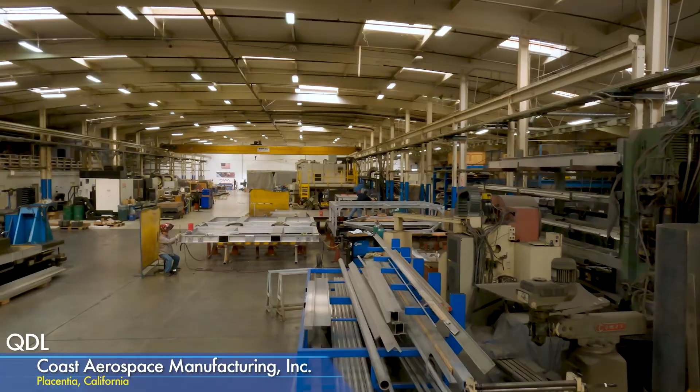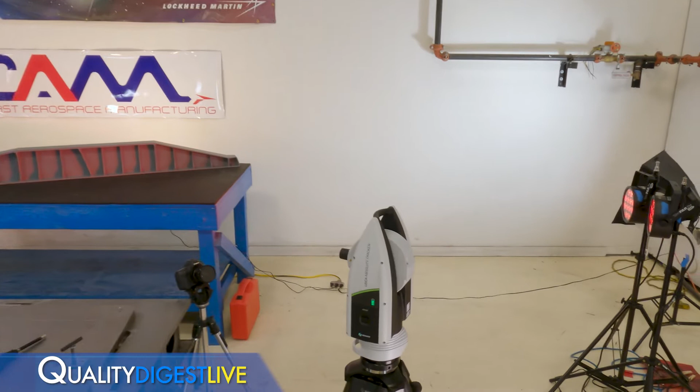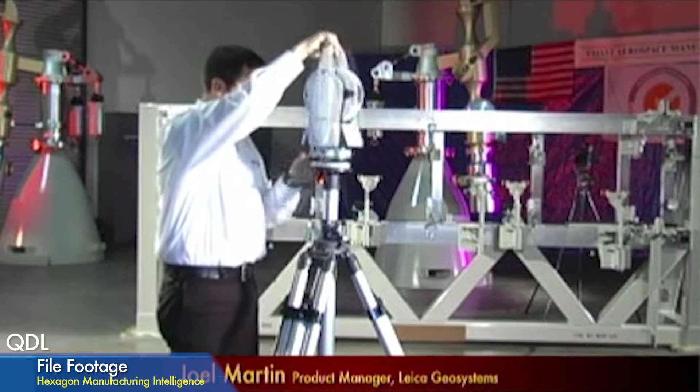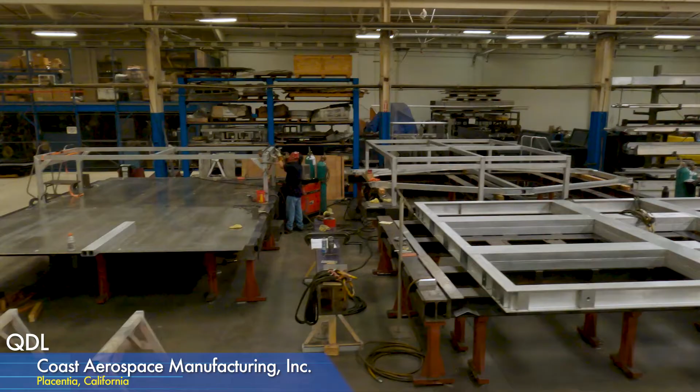And Chris, we'll get to you in just a minute, but I just want to thank Louis here for letting us come once again to your facility and take up so much of your time so that we can talk about some Hexagon products. We were last at your facility about 12 years ago when you were over in Huntington Beach, not too far from here. And you've grown since then. Now you've got your brand new building, well, not brand new now, but a new building, and it's all yours. I believe you were leasing before, so your company's grown quite a bit.

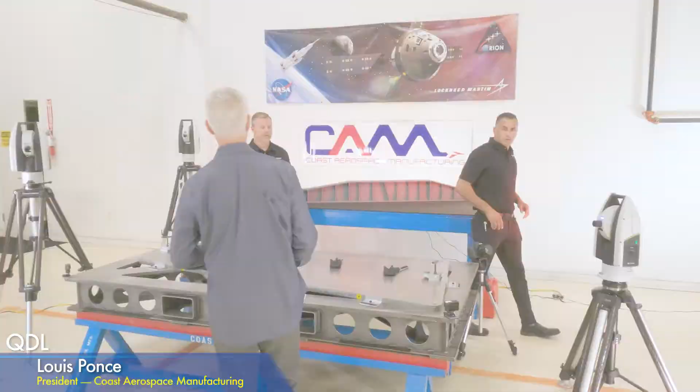It's grown. And before I start, thank you, Dirk and Chris. The relationship I've had with you guys has been wonderful, so I'm more than happy to do this. I hope this works out for Hexagon, and I'm sure your viewers really appreciate the aspects of what this brings to them. I think it's really important, key, just like when I do internships, it helps that new generation come in. So I appreciate the old and the new.

Well, thanks, Louis. Why don't you tell us a little bit about what Coast Aerospace does? Well, we've always been in the tooling manufacturing business, but over the years we've added additional products, if you will. We now do electronics. Our design group has grown, which has entailed more electronics, more proof loads and testing and so forth. So those aspects have grown along with the company. We're in a larger facility now, just enjoying it, whatever we can when the business is good. It always seems to be predicated on how much work is there.

Yeah, so this is a good time. How old is Coast? I started at Coast in June of 1999. And so you've had a relationship with Hexagon for quite a while as well, right? I mean, what, 20 years? 15 years? A very good one over the years, one that I feel very confident when I get with my customers for support and their products.

Louis had a predecessor to this. This is an AT500 MR laser tracker. He had a 901 prior to that, and he had a T-probe with that system. He was able to take the T-probe that he had but couple it with a new tracker that's much more portable, and move into new technology while still being able to use the software he was using in the past, but then going to new versions that have more capability.

So the value that we have in relationships like this—I look back 12 years ago when we introduced the AT401 laser tracker here with Louis—is that we're able to bring it to market, but we're also able to take feedback from our customers like Coast and take that back to our colleagues that are developing new products, whether it be metrology software, CAD/CAM software, accessories for machine tools, or accessories for metrology devices, and make their life more efficient.

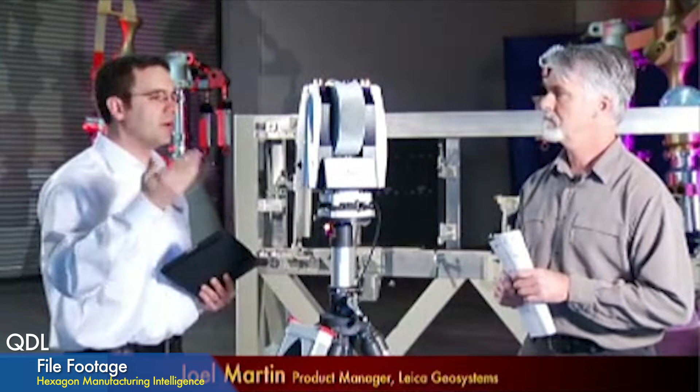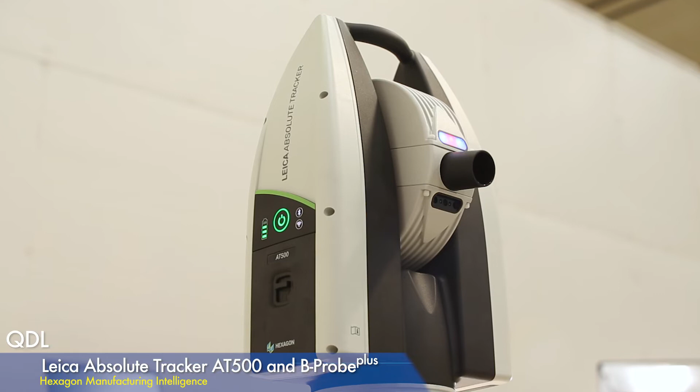Chris, you mentioned that the last time we were at Coast, there was a different laser tracker, the AT401, right? That's correct. That was kind of the new release of a tracker at that point. We did an AT401 launch event at Coast Aerospace some 12 years ago at their old location. I remember it very well because I was only 3 years into working with laser trackers at Hexagon at that point in time. So it's nice to revisit Coast to bring the new product that will replace the 400 series with. We went from 12 years ago, we had 3 iterations of the 400 series tracker.

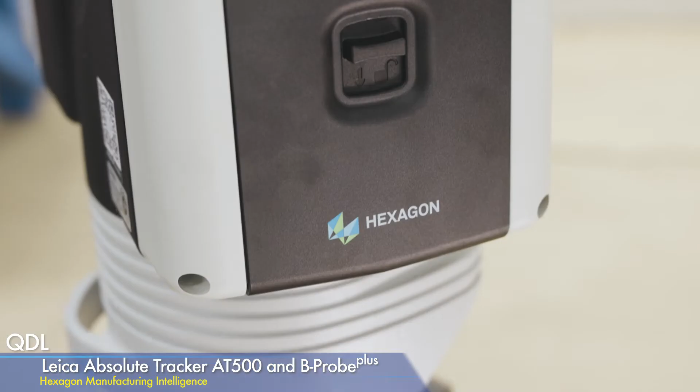We went from the 401, which was just a 3D tracker using a reflector, to the 402. At the time the 402 came out, we made improvements in the technology, but we also added the B probe as a probing solution for it. Then we came to market with the 403, also offered the B probe, and it was more dynamic than what the predecessors were. And now, in June 8th of this year, we released the AT500 as our new system.

Joining the Absolute laser tracker family, we call it the Absolute trackers, and we have 4 systems now. They look very similar in nature. We have the AT500, the AT600, the AT930, and the AT960. It really depends on the customer's application, what tool is best for the job.

Our application engineers and sales engineers work with our customers to go in and say, what are the tolerances that you're trying to achieve? Are the parts way up high that you're trying to measure? Do you need longer ranges, or can you get by with a shorter range? So our sales engineers and application engineers are picking the right tool for the job, and the tool in this particular case is our Absolute Tracker AT500. We offer it both as a 3D tracker, or as a probing system, or if a customer decides they want a 3D tracker up front and they want to add the probe, we call it the B Probe Plus, they want to add the probe at some later date, they can.

Okay, let's take a look at them.

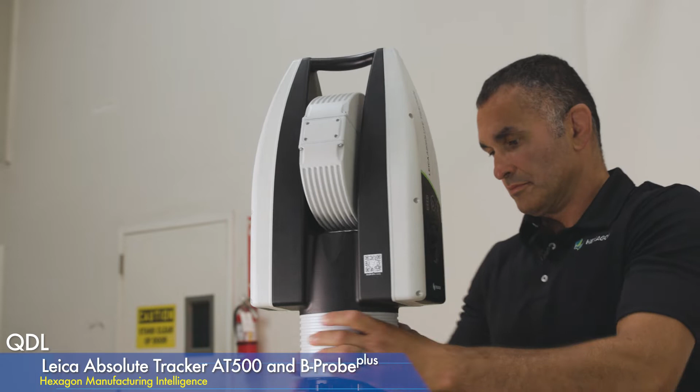Tim Cordova is joining us here. Tim is our sales engineer for the West Coast for trackers. Tim's been on board longer than I have. So by the time we were at Coast the last time, 12 years ago, Tim had already been on board at Hexagon, and prior to that, Leica Geosystems for 6-8 years. I joined about 4 years after Tim joined. So we've been supporting this product in entirety, and we feel like we know it really, really well and love to help our customers with it.

Was that the setup? That was the setup. So as you can see, there I am - I just propped it on top of the tripod, and here, he was done. I set it up here, and we're ready to go.

That is actually one of the key differences, from my recollection, one of the key differences from the 401 that I saw a long time ago, which was still a pretty easy setup, but that's like all in one, right? Yeah, so what we've done, this is our very first laser tracker in our Absolute Tracker family, and our first laser tracker at all, where we've integrated the controller into the tracker itself. So if you look at Louis' AT960 here, we have the controller here, and we have the sensor cable here. Right, and a battery, is that a battery pack also?

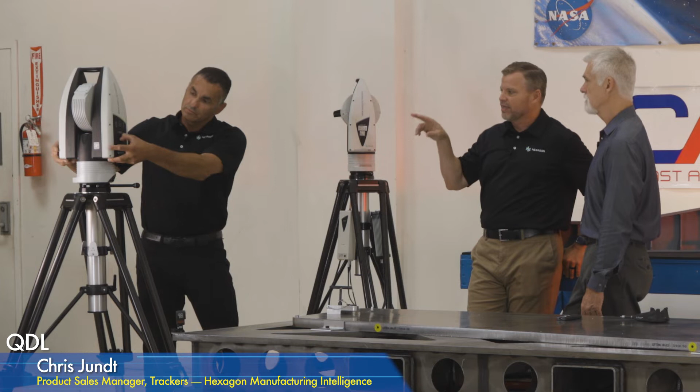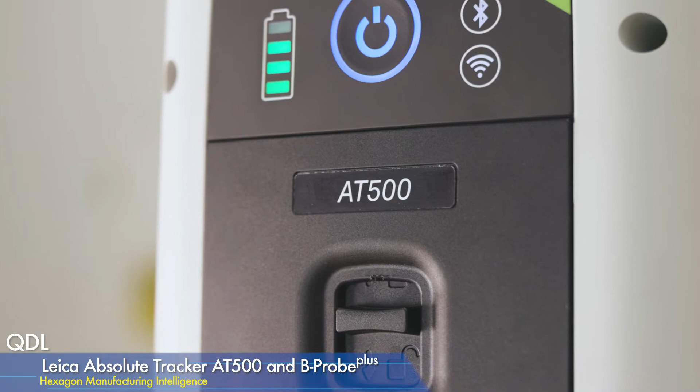That is an external battery available for it, but everything's external here. This is even cleaner yet, where we have an integrated controller. We have 2 batteries on board here. Those 2 batteries will actually run the system for up to 6 hours. But the beauty is those 2 batteries are not integrated into the laser tracker, they're removable. So the benefit is if you recognize, by viewing the battery indicator, that a battery is getting close to being out, you can grab another battery and hot swap the batteries in place with the tracker not shutting down. So we just cleaned it up from a portability standpoint.

You saw Tim walk in here with the handle, and he put it right on the stand. He now hits the button to turn it on. Okay. And because we have an absolute distance meter in it, it is solid state and it fires up very quickly. Okay. With the sake of the 960 here, it still has an interferometer as well, and there's some cases and some applications where people really like that highly dynamic laser tracker yet today.

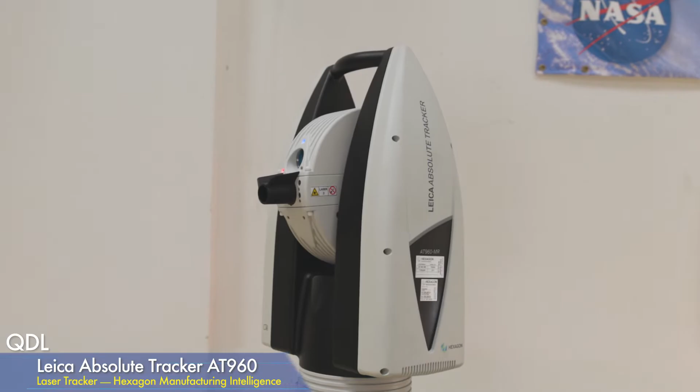But the IFM has a laser oven. The laser oven takes about 8 minutes to warm up. Okay. This being solid state, you hit the button and it's ready for use.

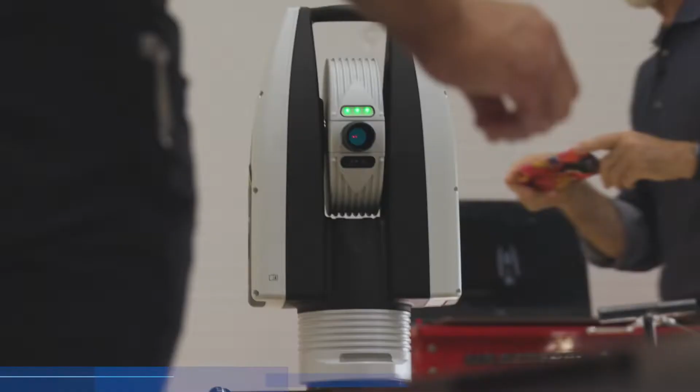I hesitate to say this, but I think I've heard you mention a few times that this is kind of an entry level laser tracker, but it also kind of just depends on what your needs are, right? It might be entry level for some people, or some people it's like, no, I don't need any more than that. It does exactly what I want. It's really the entry to our absolute tracker family.

Okay. And where Tim and I looked at it for a long period of time, we've always been known for the highest end equipment. Sure. So when you look at competitive products out in the market, we would have a gap in our product offering. And really the AT500 and the AT500 probing system now fills that gap. And it's been very popular for us so far. So there would be certain cases people absolutely love the 400 series, but it left a bit of a gap in our overall family, and this fills that gap.

What kind of customer problems, application problems do you feel that the 500 addresses best? Well, in the case of what we offered before, certainly the 960 MR T-Probe, we can offer this with a scanner. We can do robot calibration, highly dynamic work. Not everybody needs that, right? So somebody's needing to pay for something that maybe they don't need because it's our highest offering.

Sure. So where we find that the 500 fits in is shops very similar to this. Like in the back of Coast shop here, they're doing a lot of fabrication, they're doing welding, and you have the probing system here in the AT500 that matches the tolerances on the part. Typically in industry, you want the system to be 4 times more accurate than the tolerances in the part. So it allows for a less costly solution to still meet those requirements and the customer to be able to get their job done. So that's really where it falls in.

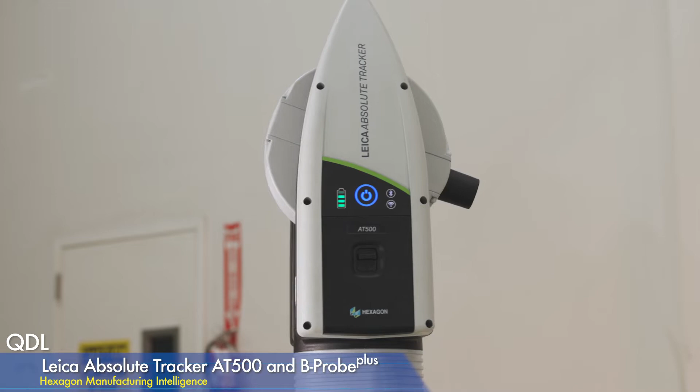Yep, there we go. And I think all your trackers have, what do you call it, where you can break the beam and it'll recover it. But even more than that, you can not just break the beam, but move to a different location and it'll pick it up again. It'll reacquire the target, whether that target be a reflector or a B-Probe Plus, or like with the 960, whether that target's a T-Probe or a scanner.

It'll just pick it up and you're able to use it. Now the great indication, what you showed there, is you can tell right away that the blue lights come on in the tracker where it's looking for a target right now, because it's not locked on and it's looking to acquire it. This is our 5th generation of Power Lock. So we continue to make improvements in what its capability is.

I would say our 1st generation came in, what, 2009, Tim, something like that? Yeah. So that 1st generation was better than what competitor products offer today. But we're at our 5th generation, so as you're tweaking the firmware, as you're tweaking the capability and new component capability comes to light, then we can apply that to the product and make it better yet today.

I've tracked with an AT500, even though our specs are 160 meters, I've been outside in the sun at 190 meters and break the beam, maybe a car goes through the beam, I'll come back to either looking for the beam and locking on, or if you come back to about 80, 90 meters, it just finds the reflector and off and running.

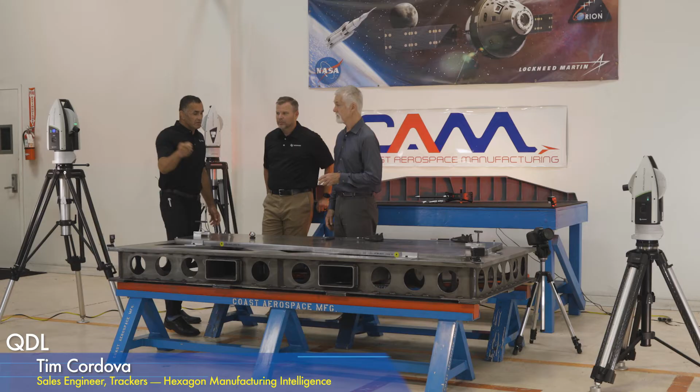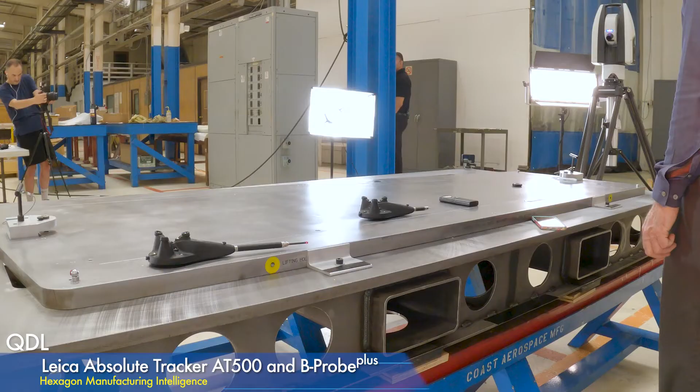I would like to show what that looks like. Maybe we can do a quick demo of moving around with the reflector, going behind an object or something, so we can actually see how it does reacquire. Yeah, we're gonna switch to that one because it's just a better view. Okay. But look, you see that tracker just instantly grab this one. Yep. And now as I walk over here, I'm gonna go behind these beams and the tracker's just going to follow and catch on to me on the other side.

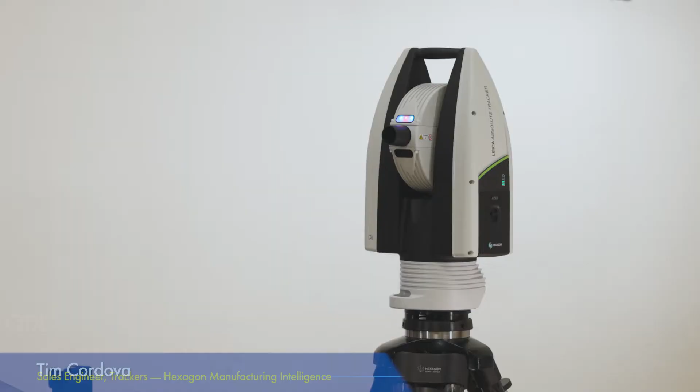Obviously the beam was lost. Yeah, so right here, the beam is lost. It no longer can see the beam. Right. Once I get into its view, it instantly locks back on and picks it right back up. Okay. So if you look back many, many years, when laser trackers first came out, most of them were interferometer based, no ADM.

And so you would start at a bird bath on the laser tracker, that's your zero position, and you would move out and start using it. You were always so cautious. You would tape off a given area because you don't want people breaking your beam, you don't want forklift traffic across it. If somebody broke the beam, or you're using a 1/2-inch corner cube reflector and you just tilt it ever so slightly and the beam breaks, that means a trip back to the bird bath. All the way back, line it up. Right. So for all of our trackers today, we have no bird baths on our systems.

They initialize automatically when they're ready, and you present a target to them, they acquire the target, and you just start measuring. We've had customers justify purchases of our systems in a shop like this largely because of Power Lock. If you can imagine being on Louis' 5-axis machine down here, doing an inspection on the machine, and you're being careful where you're walking, and there's some trip hazards there, you're not wanting to pay attention to the reflector, you want to pay attention to your health and wellness, right? So you get to where you need to go, you're safely there, lock on, and start your inspection or aid in setting a detail on a tool or whatever you may be doing.

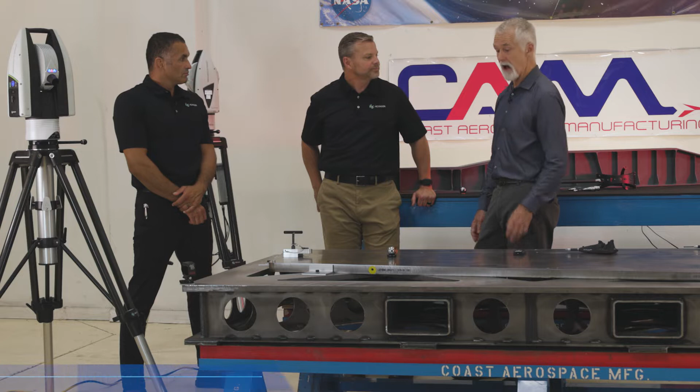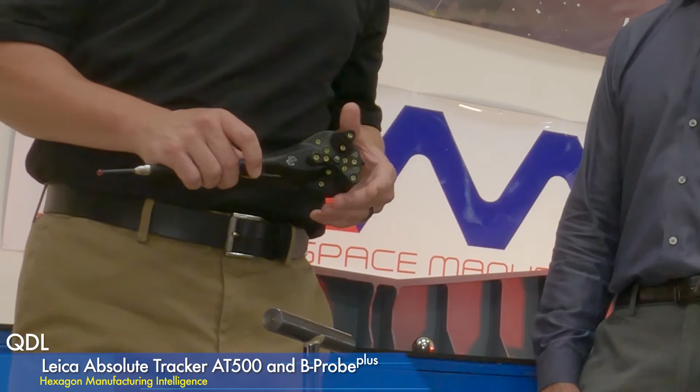Before we get to actually taking some measurements, you also mentioned the B Probe Plus. So we did have what was called the B Probe with the AT402 and the AT403. I would say most of our customers that used the B Probe back in those days were using it just to minimize, maybe if they could take 2 points, having to do a station move with the laser tracker. They would gather the points with the B Probe. The user experience was not fantastic, but it could get the job done.

What we've done now is the B Probe Plus has come out with the AT500, and it's a totally different experience, largely because of the technology that's in the tracker to be able to not only track the corner cube reflector that's embedded in here, but also track the LEDs that are on the face of it. We get XYZ position here with the laser. The camera base gives us basically pitch, roll, and yaw of where the probe is during the measurement. And so never would I have thought in the past, with a 402 or 403 tracker with a B Probe, would I do a part inspection like this.

Right. It's just not dynamic enough to do that. Right. Certainly with the 500, it brings that capability to light. Okay. And we call it the B Probe Plus. The tooling that goes along with it for probes is M5 threaded extensions, M5 threaded styluses. So if someone has a T-probe already, or they have some of these styluses from a coordinate measurement machine, they can use it on the B Probe Plus. But it's really our entry-level probing system.

What Tim's seen with customers here on the West Coast is it's very hard to distinguish the difference between the measurements coming off a B Probe Plus and an actual T-probe. Okay. It's performing well beyond our expectations, but it's where we come from. Our Swiss colleagues are ultra conservative. So when they put a specification on something, typically our customers, on a day-to-day performance, see about half of the spec.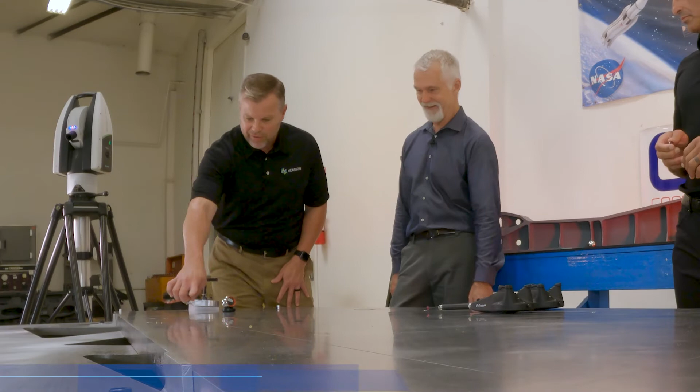Okay. Well, should we move on to taking some measurements and measure some tooling? Okay, so this is a composite layup tool that's in front of us right now, right? That's correct. Okay, and Tim, we're going to be setting up and measuring this. Yes. And we should mention that this is not a flat tool. This has actually got some contour to it, right? That's correct. It looks flat, but it's not. There's about 4 different surfaces right in this area from the scribe lines in.

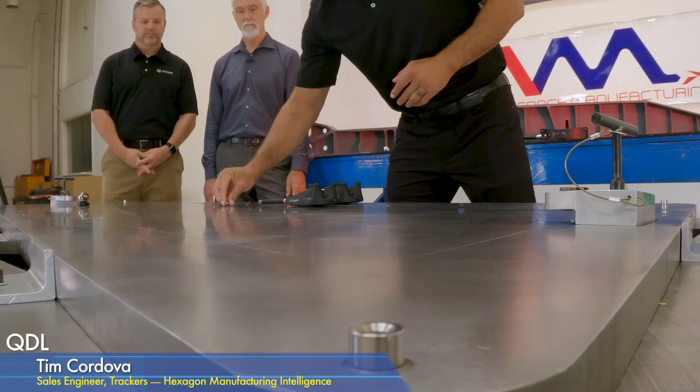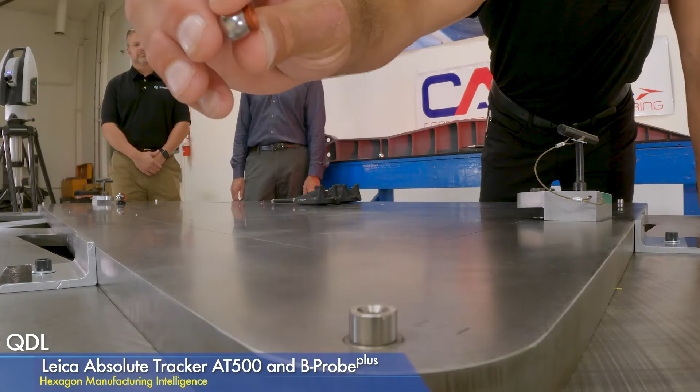Okay. Yeah, what I'm going to do is use the 1/2-inch ball and use the tooling ball targets to align to this part, and then from there we'll be able to run the reflector anywhere on the tooling surface and see where we're high, where we're low. We can switch back to our probes and check deeper areas, and then we can also grab the scribe lines. So first thing we'll do is align to the part. I'll grab my beam and measure the first point. And you see the tracker signals me that it got it.

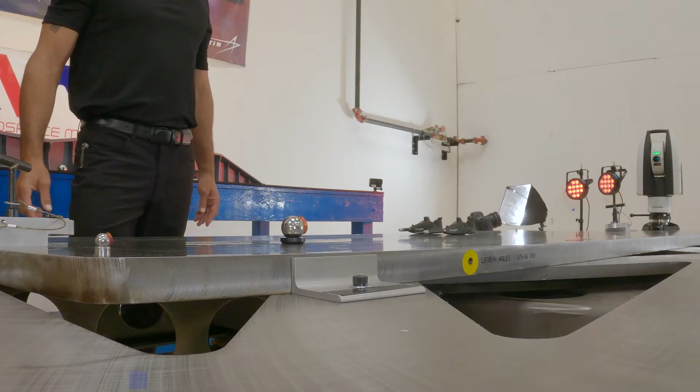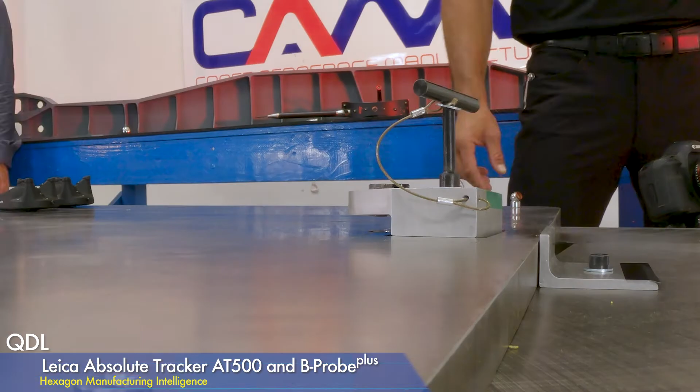Second point. I also get an audible sound from the computer, which is nice. And the three flashing green lights means it's taking a measurement? When it's flashing, it's taking a measurement. When they're solid again, it's like, hey, I'm done taking a measurement. It's okay for you to move. Okay. So if you're in a really noisy environment, you wouldn't necessarily hear that beep. Just work from the lights. Just from the lights, okay. Mm-hmm.

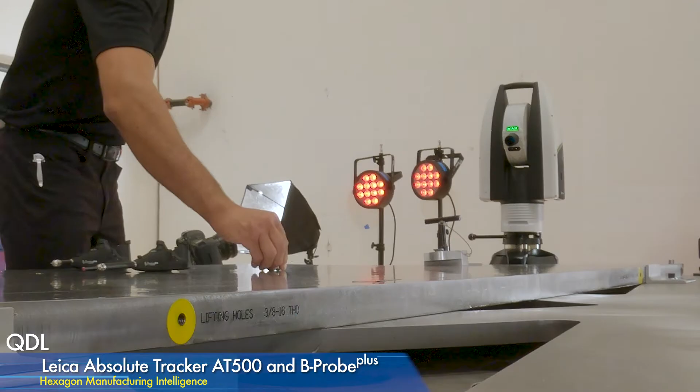And now anywhere I touch on the screen, I'm seeing the deviation back to the CAD model nominal, which is fantastic. If I wanted to record that point, I could just use my remote here and trigger a point to record it. And now I have a comparison point at that location. So I did a couple things. With the reference points, I used what's called a stable point. So as soon as the ball was stable within a tolerance, the tracker measured the point automatically for me.

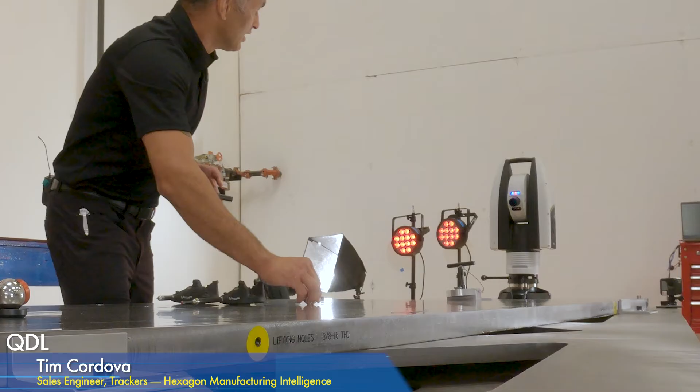Okay. I could do it that way with this, but I also have the remote, so now whenever I want to measure a point, I just go ahead and hit a single. If I wanted to scrub, I'd have to go change the setting there, and I could scrub dynamically at 100 hertz and collect 100 points a second with this tracker. Okay. So that's a big difference from the AT500 to its predecessor, right?

The AT401 that we brought to Coast 12 years ago, we only did discrete point measurement with it. It was only taking about 3 to 5 points a second when the 401 came out. This is doing 100 points a second, okay? So it's more dynamic. We got better from the 402 to the 403, but we were maybe max of 10 points per second. We're at 100 points per second here, and for most users, that's plenty fine for what they need. Yeah.

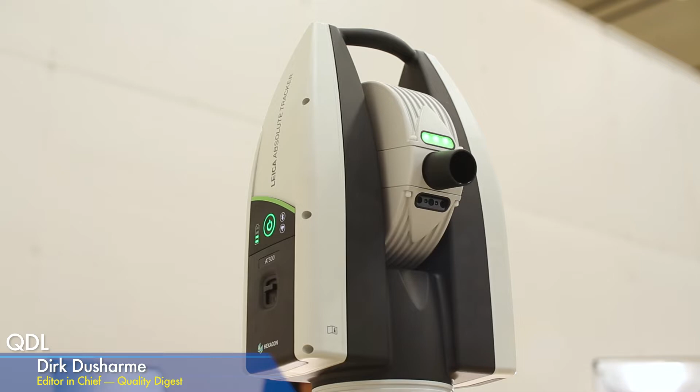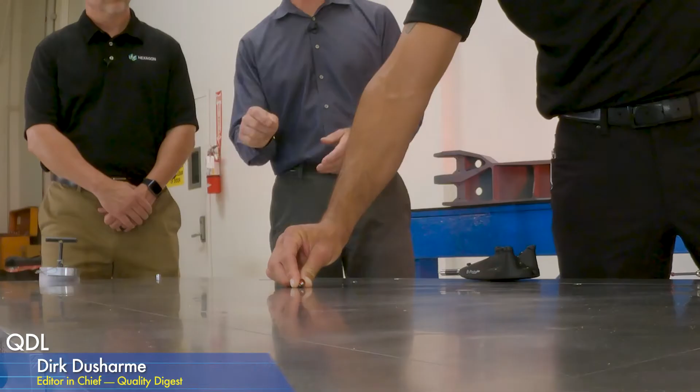So I saw you were taking points using the remote, right? Yeah, so I didn't want to use stable point, I just want to trigger a point whenever I'm ready, so I'm going to hit the button here and record a single point. The tracker comes with this little remote, which is great. Now, stable point is if you just leave it stable for a certain amount of time, it automatically takes a point. Yeah, right? If I hold it still within a certain tolerance, it'll trigger the point for me.

Instead of doing that, I want to trigger the point manually with this remote, which is very cool. So the two different methods, what's nice about them both is it prevents you from having to run back and forth to the PC or having somebody else hitting the enter button and say take a measurement. Yeah. So both those methodologies work.

And this remote is the same remote that we had with the 400 series tracker, but it has 4 buttons on it, much like the 4 buttons that are on the T-Probe. Okay. But the B-Probe Plus only has 2 buttons for taking the measurements, but the nice supplement to having the remote control, you can program those 4 buttons. So you can say the A button is, I want to take a measurement. Maybe the B button is, I goofed up and I want to back up that measurement. You can delete that point without having to go back to the PC. C and D, just create what you want them to be in the application software.

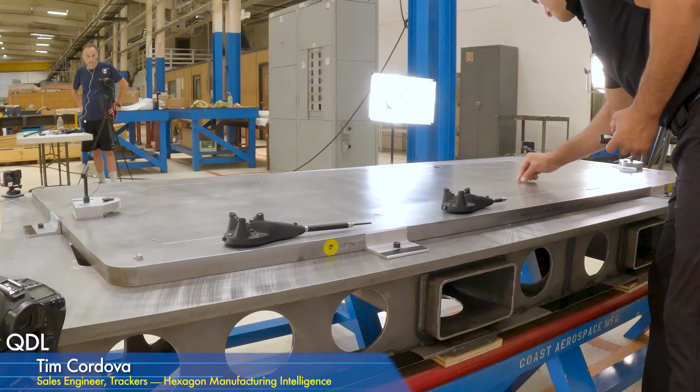Got it. The cool thing about the AT500, it's a 100 hertz tracker versus our 403, which was really a 5 to 10 hertz tracker. The cool thing is I can actually scan the surface now and get a bunch of points. So I'm actually going to tell it continuous distance. I want to take a point every 50 thousandths of an inch, and I'm going to go ahead and scan. So I'll hit the same button, the A button. So now you're taking points at 100 points per second? Correct. So now I'm collecting 100 points a second.

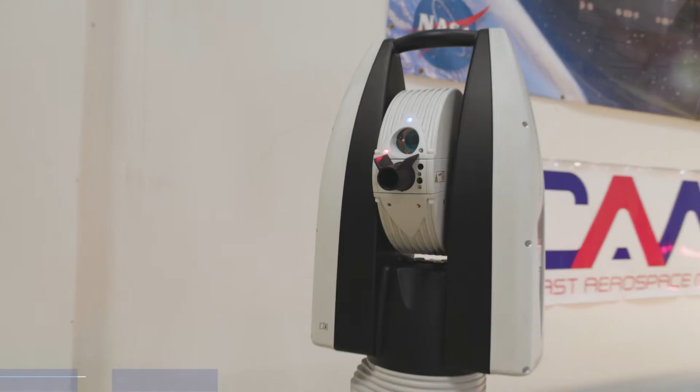So when we had the 403, it could scrub about 10 points a second, but we typically wanted to keep that being a planar or a spherical geometry where you could do a geometry fit and you could filter off some of the points, right? Here in this case, we're at 100 hertz. This is not a plane, this is an organic surface. So if you had much more contour here, like we see in a lot of aerospace parts, you can actually scrub that surface with an AT500 like you would with an AT960.

Some of the differences is this is an absolute distance meter tracker. We're at 100 hertz. This system has the absolute distance meter, but also an interferometer. So if you need to get up to that 1,000 hertz... Most typically in applications like this, as long as you can scrub that surface and get it, we'll go ahead and do that. And maybe less and less people are actually doing that today. Because like what we did at Janicki early last year, we had the scanner with the AT960, so you could go non-contact and surface scan it. So it just depends on the application, what's required, how the customer wants to approach it. Okay.

So that was using a reflector, but we've got 2 different B-Probe Plus, right? The B-Probe Plus allows us to use a longer probe and not be forced to use just either the 1/2 inch, 7/8 or 1.5 inch ball. So that's great. I can easily switch to my B-Probe Plus, grab my beam, and in the computer, I'm in the same coordinate system because the tracker hasn't moved, and now I can digitize holes, what have you. I'm comparing back to the CAD model, and I can just take points, just like that. Now again, this is single point measurement with the B-Probe Plus.

Yeah, okay. And so the user experience is night and day versus what the B-Probe was with the 403 or the 402. You can see Tim here, he's taking a measurement very, very quickly. It's almost like a half a second measurement. It's right in that ballpark. Okay. So really, really quick.

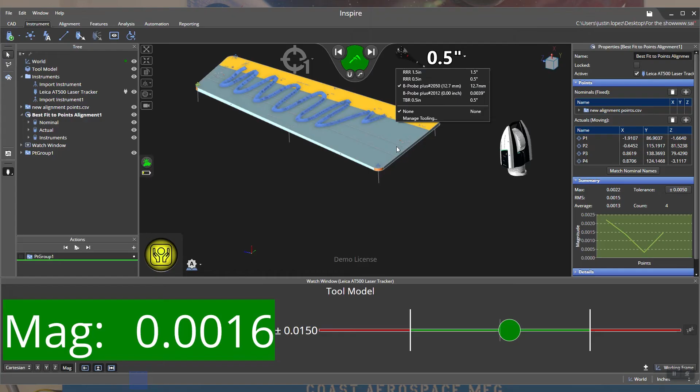The other thing that you can do with the B-Probe Plus that we couldn't do with the predecessor, the B-Probe, is that a lot of customers, when they're setting, let's say, a detail on a tool, or they're aiding in assembly, the B-Probe didn't have a live readout dynamically telling where you are from where you need to go. Oh, okay. A live readout. Yeah, live readout. So what we have right now is the B-Probe Plus has that dynamic capability where, okay, this is my deviation from CAD, and maybe you want to drive that detail to 0. It has the capability of doing so just like you would with a reflector. So that's new with the 500.

The one thing that we don't do with the B-Probe Plus that we did do with a reflector is when you saw Tim scrubbing the surface with a corner cube reflector.

Yeah, we don't do that with a B-Probe Plus. A bit of it has to do with the technology that we use: it's a fixed field of view to look at the LEDs on the B-Probe Plus. Versus when we get to the T-Probe with the 960, now we have that capability to go in and scrub that surface. But it really depends on the customer's application. Most people that we've been finding homes for AT500s already are just tickled pink with the capabilities of where it is today. If they need more, then they'll look for more.

Now, I'm assuming that the software is able to identify, because I noticed you actually have two. That's a great question. The software can identify which one is which? Like if he picks up the different one, it knows. So it's a little bit different technology. With the T-Probe, with the 960, we have the ability to recognize what T-Probe is presented to the tracker. We also have what stylus is actually on the T-Probe. The tracker knows which one it is.

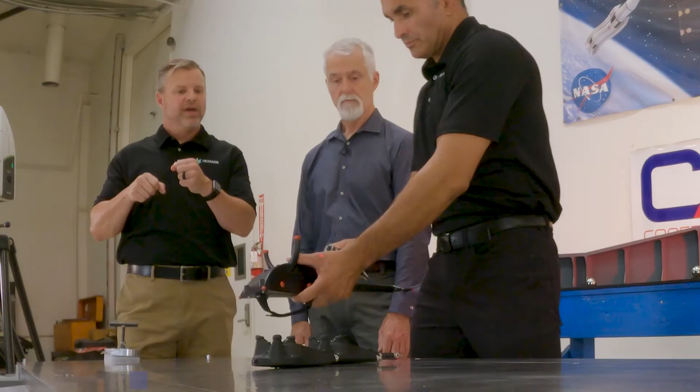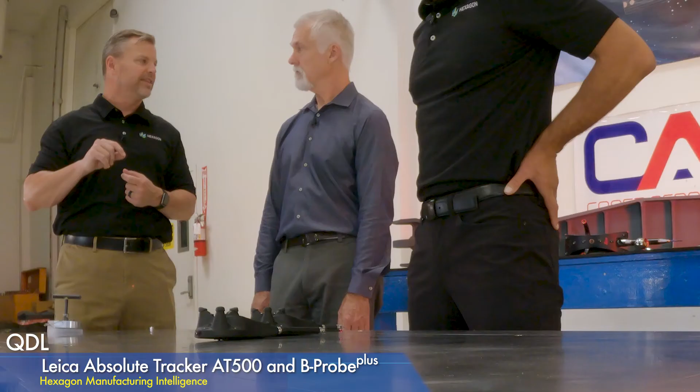For the purposes of being a little bit more cost conscious for our customers, with the B-Probe Plus we don't recognize what the B-Probe is. The application software and the end user will go in and select the B-Probe that they're using, and then they qualify the tip that they want to use. That process is very, very quick. It's about 6 points with the probe, and it's qualified and ready for use.

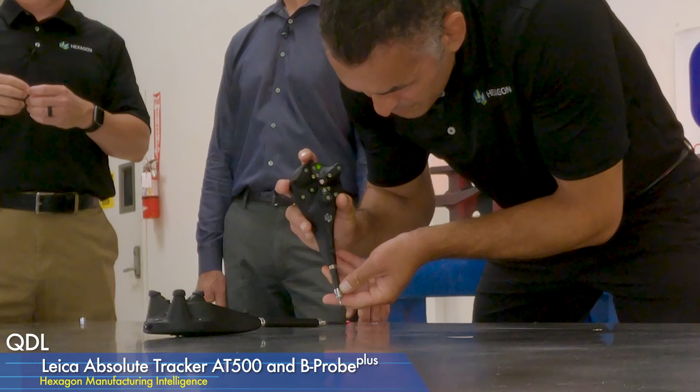Most of our customers, if a customer buys one AT500 with one B-Probe, you're set up using, like in this case, a 6mm probe there on the one laying on the tool. If you wanted to use a 1/2 inch, or you wanted to go to a scribe tip like the one that Tim has in his hand, you would typically unthread the M5 thread, put a new one in, and you'd go through that qualification process.

The benefit that you do have is, let's say you're at a customer, and much like we have today, we have two AT500s. These two AT500s both have B-Probe Pluses with them. So what we did is we assigned both B-Probe Pluses to both trackers. So it's really nice because then you can say, I want to use the 6mm, lock on, pick it, make sure you have the right one.

Then when you get to an application where you want to use the scribe tip, because of this scribe line, you can go in and select that one and use it. So they're already pre-qualified. You can shift between the two. You just have to tell it which one you're using. So you're not limited. A customer could say that I want to buy a probing system, and then at some later date, I want to go add another B-Probe Plus. You certainly can do that if you so desire.

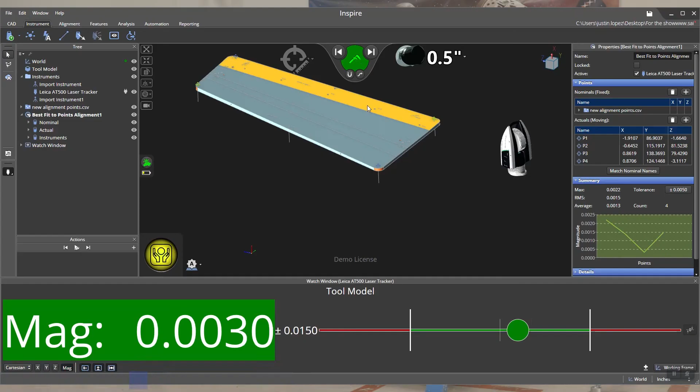So tell me a little bit about the software we're using today. Yeah, so the software we're using today is a metrology-based software developed by Hexagon, and it's predominantly used with portable equipment. We call it Inspire. So Hexagon has 3 metrology software platforms. They're running PC-DMIS over here on this bridge machine behind us. We also have Spatial Analyzer, which is a really high-end software capability that the likes of Northrop down the road uses. You see it a lot in aerospace for sure, shipbuilding for sure.

But we're coming to market with Inspire. We used it at Janicki when we were there last spring, and it just continues to grow and have more capability. But the intent of why something new? Well, when you start at ground zero developing something, you can make it more capable and you can make it easier to use. So the whole concept of Inspire is ease of use, but also handling point cloud data really well. In the case of the AT500 today, we don't need point cloud data necessarily. We're only grabbing 100 points a second.

Right. But in the case of when we use the Absolute Scanner AS1, we're doing 1.2 million points a second, so we have to have a software capable of collecting that data. But the AT500's been out since June 8th. Nearly every software, whether it be a Hexagon software or a third-party software that people are using out there today, has interfaces for the AT500 already.

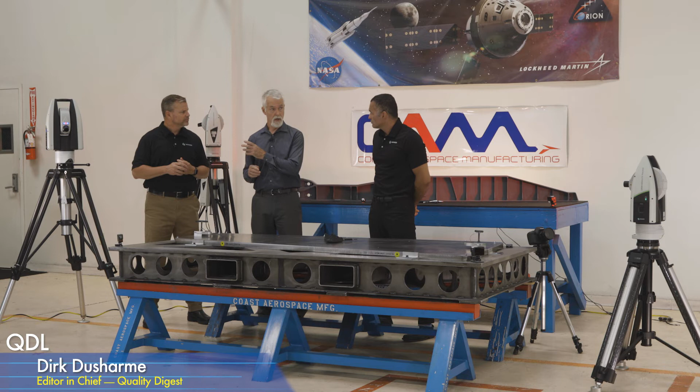I noticed, unlike a lot of Hexagon equipment I've seen before, there's no data cable going from the AT500 to the computer, so I'm assuming there's some wireless communication going on. Yeah, all three of these trackers we have here today are broadcasting an SSID for Wi-Fi.

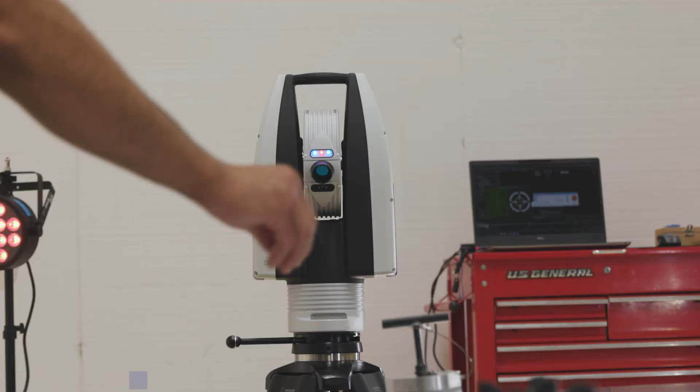We know each one - the AT500 has a given serial number, the AT960 has a given serial number. So just like at Starbucks when you want to get on the Wi-Fi network, you do the same with these laser trackers. It's very easy to communicate that way, especially when doing reflector-based or probe-based measurements.

That's a complement to being able to run on batteries. So you don't have trip hazards on the floor, and if you want to pick up the tracker and move it elsewhere, you don't have to think about the LAN cable or the power cable going along with you.

But there are a lot of customers in the country that have to be sensitive to Wi-Fi communication and Bluetooth - in terms of security. Right, there's a number of customers here local on the West Coast who ask us, we can't have Wi-Fi here, you can't have any wireless communication at all. There might be spies out there sucking up the data - whatever it may be, it's just not allowed.

Customers will ask us, can you remove the Wi-Fi card out of it? Can you remove the Bluetooth card out of it? We typically don't ever do that, because what we have the means to do is disable it at a level where an end user could never turn it back on.

Let's say we take this AT500, sell it to a customer who's going to put it into a classified environment - we disable it all. It goes into the classified environment and is used there. But let's say 12 or 18 months later, that customer wants to bring it out for preventative maintenance and calibration certification - none of that data from inside those four walls comes out with the tracker. So we can disable that Wi-Fi, disable that Bluetooth altogether, and then they just use LAN.

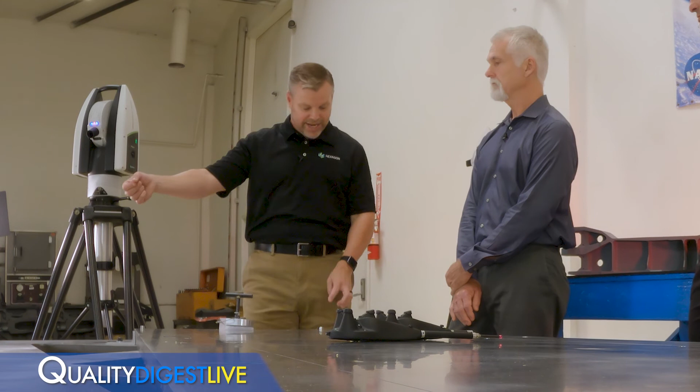But when it is necessary, you have the ability to go through, level up the tracker, go through an orient to gravity process, and then the standing axis of the tracker is level to gravity. So what you can end up doing is take a point right here and say, oh, this is Z0 right here. Then you can move over with a reflector into a new position and see high, low, where that point is relative to this one, but level to gravity. And if you needed to adjust this tool or object to make it level, you can. But it's not something you have to do every time, only when the level to gravity applications present themselves.

Our trackers, really with the inception of the AT401 some 12 years ago, started to be used more and more for leveling applications, especially at long ranges, than ever before. The reason is the tilt compensator we brought to light back then, which all of our trackers still have today, is 2 times more accurate than any other level on a laser tracker in the market. We're at plus or minus 1 arc second, while most other devices are plus or minus 2 arc seconds. So people really take advantage of using a laser tracker to replace transits and levels from the past.

One of the things with the 403, it had a great level in it, but you were forced to level it for the most part, and it could only work in the vertical position. So the cool thing about the AT500 that we didn't mention is it can be mounted in any orientation—hung upside down, on its side, any orientation. That's a nice enhancement over the 403.

Yeah, you kind of go back to the past. When Tim started with us, most normally the trackers only had plus or minus 45 degrees of angle. So you'd have customers that want to measure straight down or straight up, and they would have to lay it on its side. The 401, 402, 403, we couldn't do that with it.